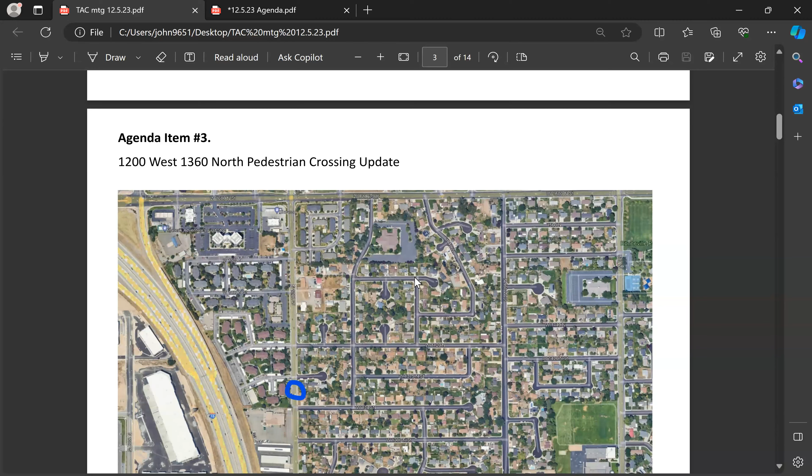And regarding crossings, this is one we've looked at before. This is I-15, here's 12th, and Bonneville, I believe. So what's the little circle here - I just wanted to give you an idea. Here's 1600 north. As we zoom in, this is 12th west, 1360 north.

I believe north is left. So, where north is - this is right here, and north is on this left side. You said it's 13th? Well, there is no 13th, it's between like 1340 and 1380.

One piece is that, and just to get into the weeds a little bit, there's a pop out right here where we can go ahead and modify this ADA ramp so we can have a crossing. This triangular pop out into the property means there's no right of way acquisition needed. That's one piece of why we look at putting it in there.

This is just a pedestrian crossing. Typically we don't try to put pedestrian crossings signalized at intersections, but that's why we're bringing it here for discussion. It's 1360 - not a main intersection, it's coming out of housing, and it's in the middle of the block.

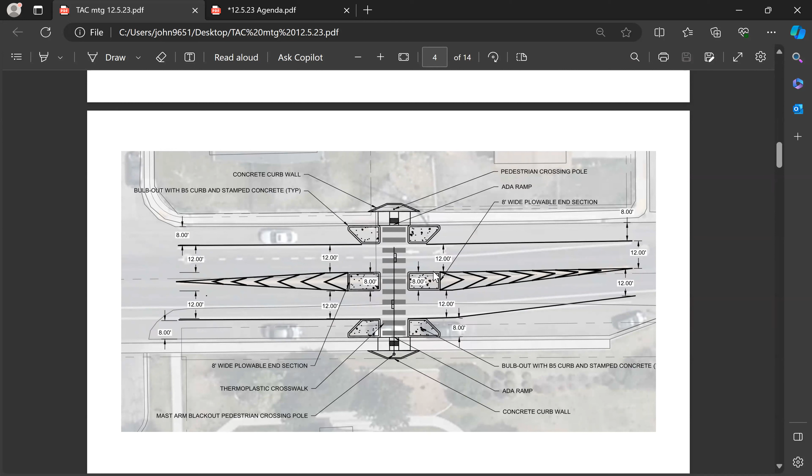Well, it's people. We don't put these on collectors and arterials, that's kind of the tricky part. Does this include streetlights so that it's lit better? I drive that road all the time, and boy, that's dark.

I mean, we can, you can see one right here. So typically, if it's well lit, adults will use this at night too. Where is the closest bus stop to that? That area is well lit.

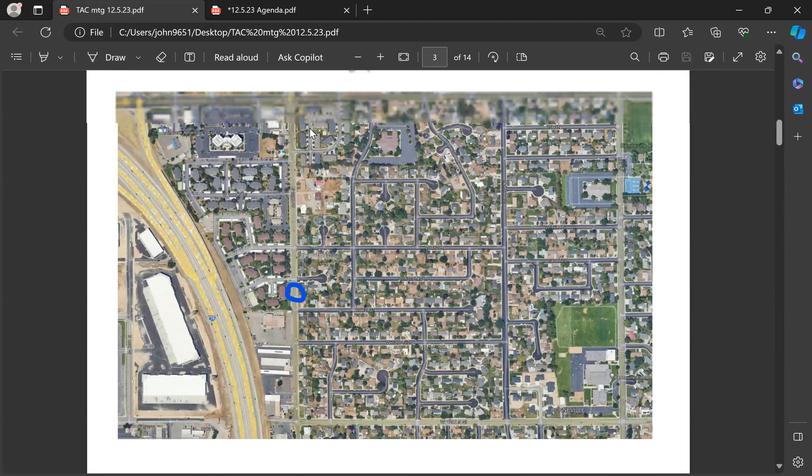Any idea where the closest bus stop is to this school? No, the city bus, UTA. Is it up by Holiday? Is it up here? I just feel like I've seen people standing there, but I can't remember where. Might be closer to 12th, I'm not sure.

We were just looking at 8th North, and the stop is close to the 8th North intersection, just a little bit south of it, because it captures that area.

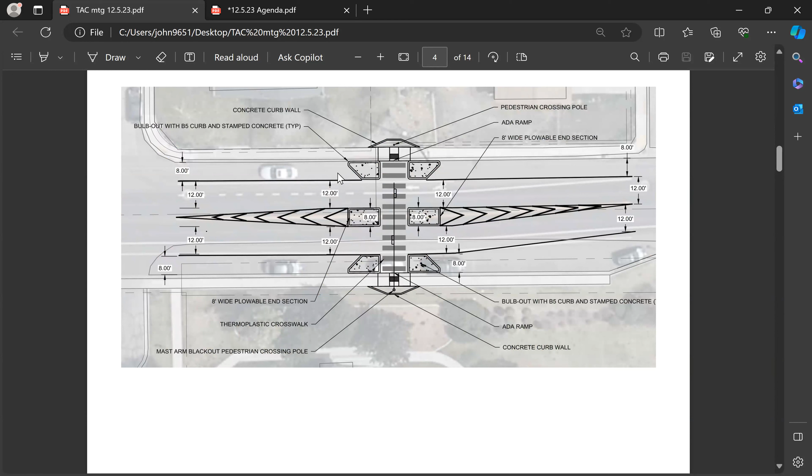I personally think if the school is asking for it - well, the PTA is - yeah, the PTA is asking for it, that this is a great place to start that. And hopefully it's, we feel that they will come, type of stuff.

These are all concrete bulb-outs, there's refuges out here that protect. What works well is that there's no driveways for these houses, so by doing this, we're not blocking anybody. It depends on what we put out there.

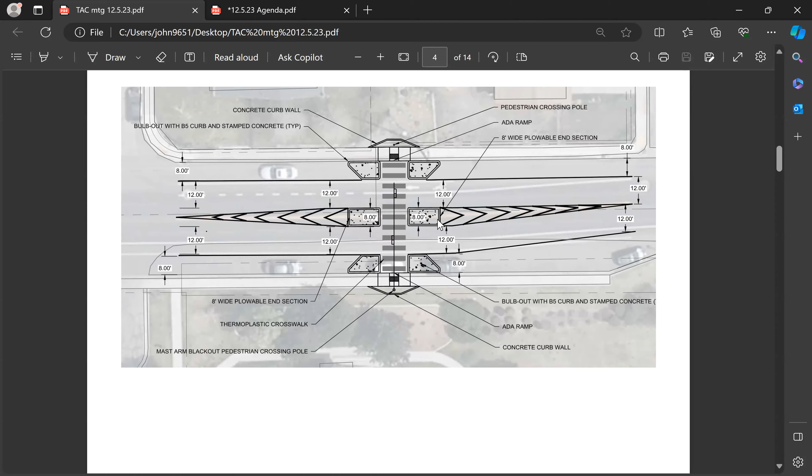This is one in my neighborhood where these beacons flash really bright - this is kind of the cheaper version. They press a button and it flickers and flashes, going on to a school about the same distance as Bonneville. I actually saw a kid yesterday just run through it without pressing the button on the scooter, and I'm like, man.

There actually is a bus stop further south there - right here? That would be right in good, just a little north, easy. Yeah, right in there, the UTA bus stop there. Oh great, and be dropping off at home.

We have options. Again, this is the cheaper option. This is somewhere similar to a signal price. These are basically the same mast arms, but with different kinds of heads. We've got to talk to Public Works and figure out what will work best.

There's definitely a cost with these - 100,000 plus. But if you're supportive of it, we'll pursue getting a study - we already can have an internal design, so we probably don't need to study how many peds are there, because we already tried. This really is to corral people to use it.

So the next step would be to fine-tune our costs and get an estimate. That's the question too - HAWK signals are anywhere from $100,000 to $150,000. And if we're gonna put a hawk there, that's the one right there that actually has the red lights - it stops there, it'll be that way.

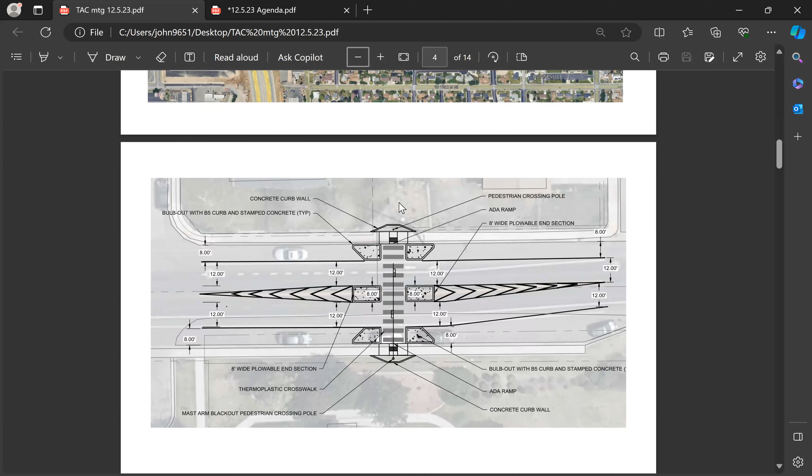Would it make sense to provisionally approve it and have a conversation with the PTA, asking some of the questions we're talking about? Or have them do a survey of the 44 families and figure out something. I want to say yes, let's put this in, they're asking for it.

And I trust them, I want to believe them. I also want to do a little bit of due diligence to make sure. But do we need more information than they've already told us about how many kids go to their school?

You don't know how many families of those 44 would have their children use it versus drive them? It's not shared.

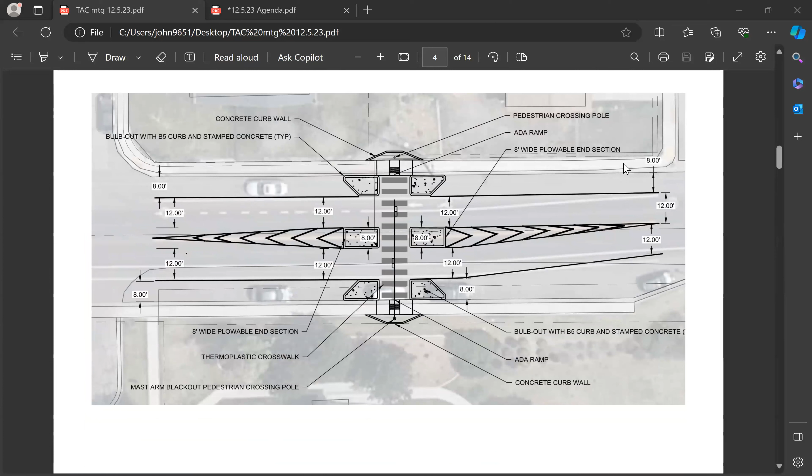One is it's ADA, which would be required anyways, but the crossing distances are greatly reduced. You can see there's 8 feet and 12 feet. So instead of a 20-foot to the center, it's 12. And then there's a little bit of a pause area where they can regroup, look, and keep going. So part of it is the concrete bulb outs.

The striping, anytime you stripe anything, has a narrowing effect. For drivers, they might pay attention more, hopefully. They're not going to go from 30 to 25, but they might edge a couple miles per hour off and get more focused. And other than the mast arm itself telling vehicles to stop or yield, that's one of the biggest factors, but this is a combination of not quite traffic calming, but similar to what you would see with calming.

Is that the entire crosswalk where people are expected to just wait until the crosswalk is clear? I think if it is a legitimate school crossing, state law requires them to cross all the way, but if it's not, they can wait at the half. So it just depends—the ladder striping is never for all the way across.

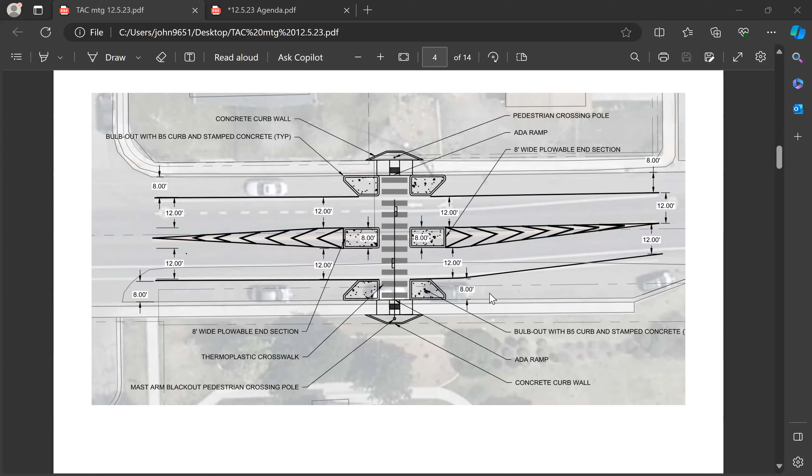I think this is a good idea. So there's probably some modification to this plan and a tighter cost, and we have to justify it if it doesn't warrant it—why aren't we using a cheaper version? Why are we going to an expensive version? So we can internally look at all this.

But the question is, do we want to vote today to keep going with it, with your support? Or do they want to go to the school, maybe, and see—or the school district? I would submit a motion that we authorize the pursuit of planning, but that should include approaching the school and the district for funding.

And figuring out the best approach, right now we have a preliminary sketch-up design, but we'll follow that up with pursuit of money for a more refined design, pursuit of money from the school district, and pursuit of information from the PTA about the ask, what they're really doing, and whether they have commitments from families to use it. How many? That kind of thing.

So I would motion that we continue to study it, approving it if we have a couple of contingencies. That was a really long motion. Could you read it back? Motion that we approve it on contingency that the city refines the plan, we approach Alpine School District for cost sharing, and we review the Bonneville PTA request and the data behind it to confirm potential use.

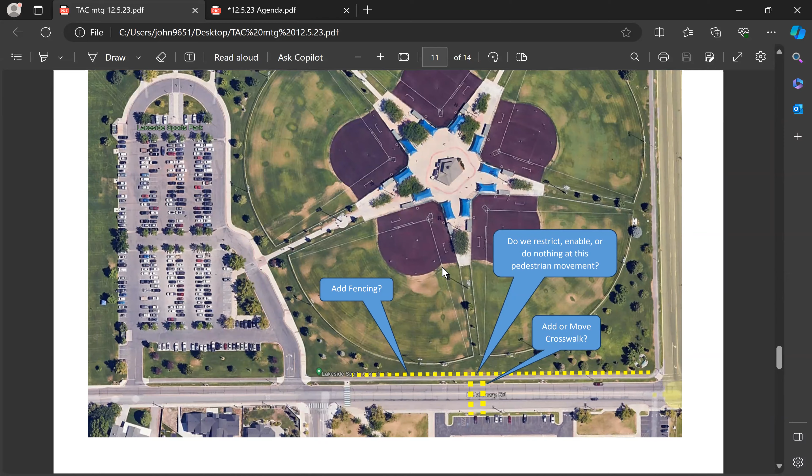We also looked at safe routes. Let me zoom out a little bit. What I estimated is there's a bunch of townhomes going in right here, and they're actually done, with more coming in. I looked at people walking the green line down to the crossing at the school, and I also looked at them going through the park. This was 4,000 feet, and this was like 2,200.

Then I switched, because it's unfair since this is only one-sided. There's not a lot of people on the west, so I did it again up here where there's a lot of higher density people, and this was 4,600 feet to the crosswalk, and this one was like 2,300.

There's a narrow walkway between the houses, so there is access right here between houses that I guess we have the right of way.

One option is where we'd work with the school district to say, are we okay to put a route through a park? Is it safe?

This would cut down on a quarter mile of walking. And what kids are doing, we're not sure if they're coming down this Vineyard Road and then pass the school and then come back.

If you look at the school, there's a pathway that takes you back to the school. So as kids walk down and turn, they're looking at the school going, I'm passing it, they cross and come in. I don't know if any are running across.

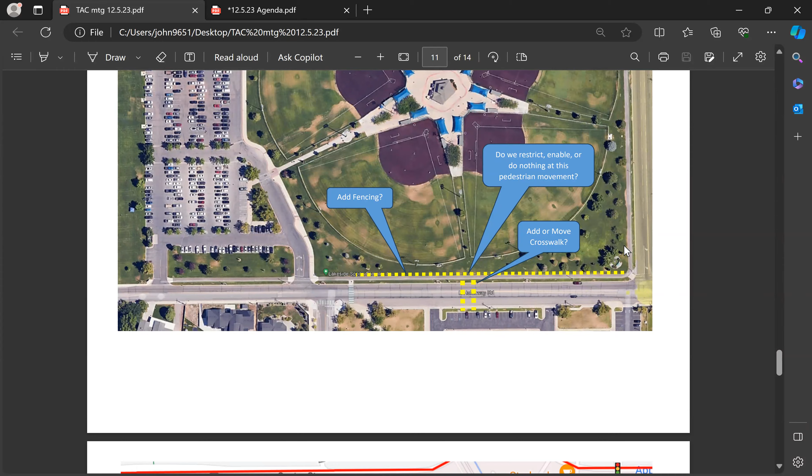There's no kid that I know who's gonna walk past the school to get to a crosswalk. People just seek the shortest, easiest route. You have this awkward intersection though of where do you put the crosswalk? Yeah, and that's an issue that can be vetted out.

Again, this isn't as detailed as the last agenda item. It's more like, this is what we're looking at, let's brainstorm, let's get ideas. Do we want to go forward as a group? That's why it involves the school district, the school, Parks and Rec, us, maybe even Vineyard.

I think there's political capital right now because of the big meeting, that could improve and enhance the safety of the street. Is there an entrance up here to the park from the north side?

Yeah, pedestrian, there is. I don't think it shows it in my pictures, but if you go back down, there's a little walkway right here.

So that right there, you mentioned whether people would walk through the park. Well, if their parents don't walk around, I did, and I guarantee you kids will be doing that. I know there's some questions about safety through parks, it's losing the park, right?

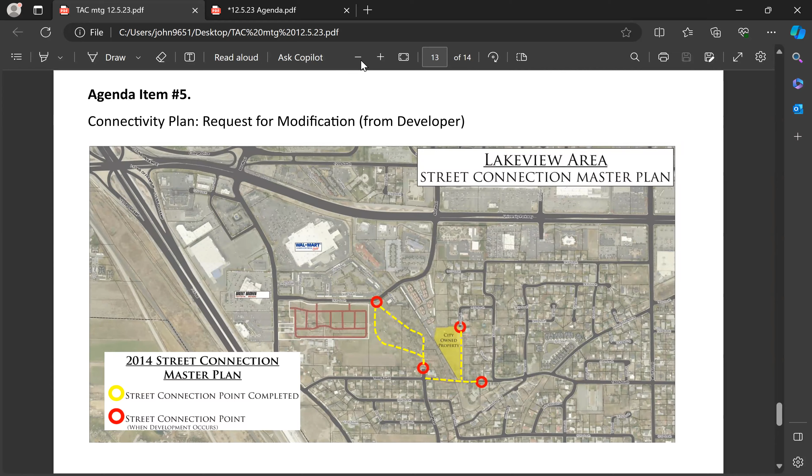This is right off the city's website and engineering - you can pull up these connection plans, and the adopted one is in yellow. Were we talking about this last time? No. So here's Walmart, here's Sandhill Road, I-15, North English Road. If I just say Krispy Kreme, we should all know where that is - south of Krispy Kreme and Boston Market.

So the red circles are right out of the plan, and it basically says we want to connect these roads. I drew in these yellow lines on my own to say this is how it could look - you have your 90 degrees that you got to create and account for. This road dead ends; this road right here is about the maximum that a cul-de-sac can be, 650 feet's the city maximum. If you put in a cul-de-sac, that actually extends it to about 670, 680, so this would technically be out of compliance if we didn't extend it.

But I wanted to confirm, Sam, is this yellow one appropriate, or did I just draw that in? What's south of that - 16th South. So there has been a lot of discussion about what's going to happen in that area. Essentially, what the plan states is that we just need to have a connection for some of these roadways. Now, if we don't, a lot of folks are pretty adamant that this connection from 16th due west would not happen.

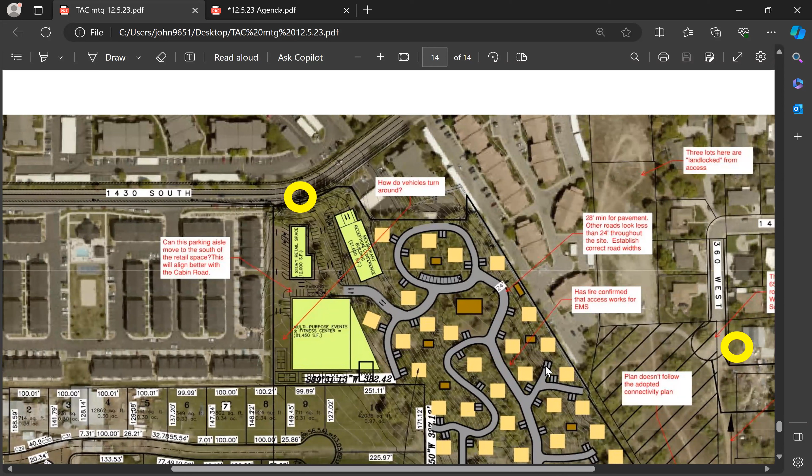There's four, an event center. This is like a VRBO, they're two-story little cabin bungalow things. Each one has 2 units, so there's 42 with 84 units. So that's even worse, because people say they don't know how to get around this ditch, and now you're in residential areas.

So the applicant is getting the site plan approved, right? It's just for the access and the zoning. Okay, so this is the site plan.

We've picked apart this site plan in many different ways. All these little white and red boxes are all just review stuff — I couldn't find the original one, so I used the design review one we have, the DRC. There's a ton of things on the site. We've had to kind of look away from the site and just focus on the access.

But the recommendation is, and his note — it's hard to see, but it says there's major grade differences right here. That's why we can't, and this is shifted over a little bit. It should be here, but I did some quick calculations, and there is a 10% grade right around here at the peak. But if you look at a road that would go in from asphalt down here to asphalt down here, you would take that hill off and it would be 5%. And 5% isn't that bad, especially since it's south facing, so the sun would get it.

So I know there's a lot of things they're saying about why they can't do this connectivity, and we understand why — if they live there, they don't want it to go through past their house — but there are engineering things we can look at, we can fix, and can be done. So there is nothing currently existing there, is this correct? Yeah, this is all pretty good wooded area, if you look at it.

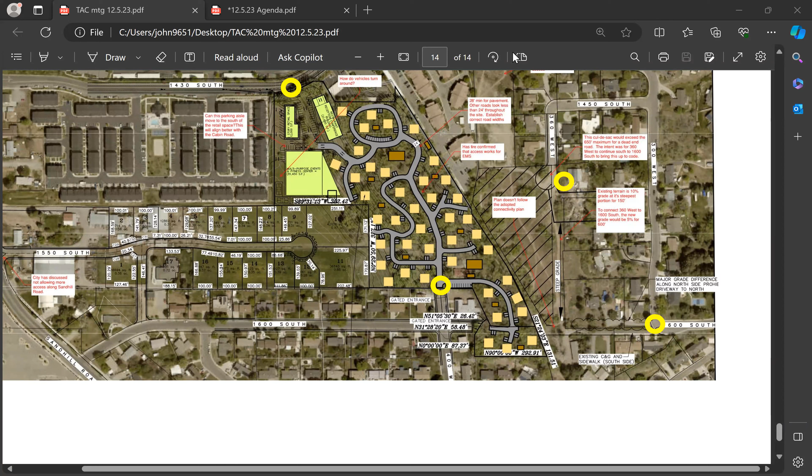When we looked at it last meeting, it was that the city's gonna look at whether to proceed with it, or we just wanted time to gestate upon it. I think it was just people wanted time to think about it and how we might approach it. I mean, I'm in favor of it.

Putting together some language that we're comfortable with, or a motion, have the city move forward with it. I think this was the language, pretty open.

Motion: ask the city to prioritize pedestrian safety in existing crosswalks near schools. And then we discussed the following suggestions that could accompany it. Begin with elementary schools, utilize the school community councils to help raise awareness and support from each neighborhood. And knowing that there's significant neighborhood opposition, the city can move on to a different school whose neighborhood welcomes the safety measures.

Do we want to complicate it with existing crosswalks and bike lanes? Do we want to bring that in, or just crosswalks right now? I would say just crosswalks, because some of the schools don't have bike lanes there, and you're bringing in the whole road cross section once you do that. Let's keep it simple.